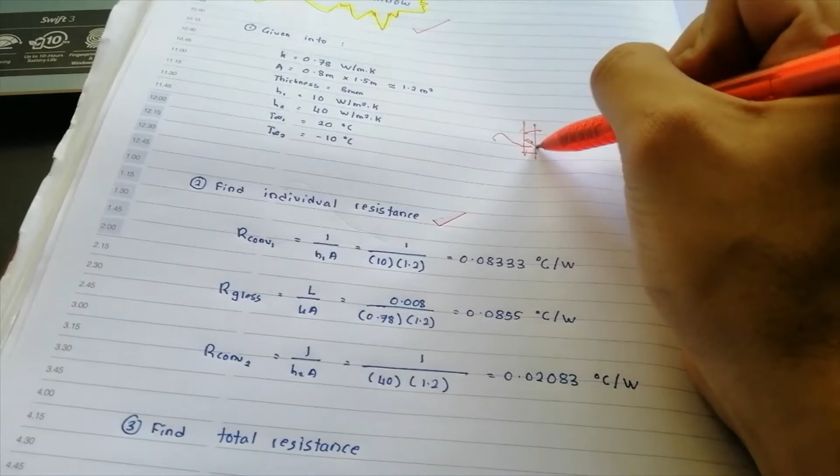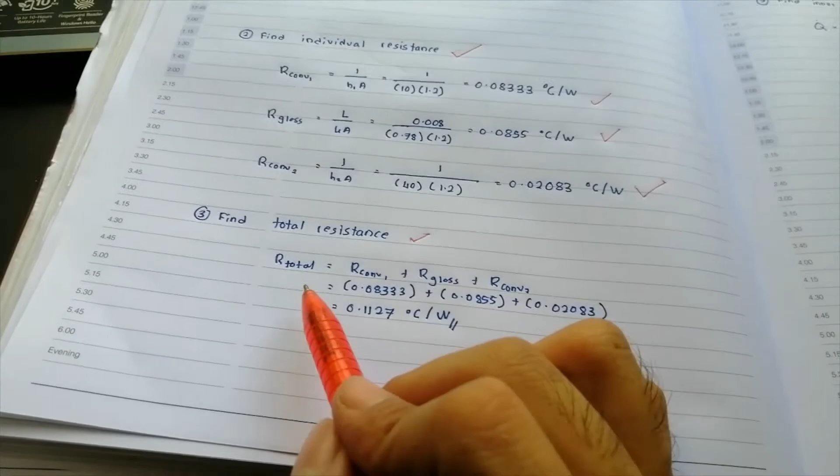So there's a window here, and then heat passes through here, and then we find the R convection, R glass, R convection, Q, and we get this answer. Next, we move to find the total resistance, meaning we sum up all these items, so we get this value: 0.1127 degrees Celsius per watt.

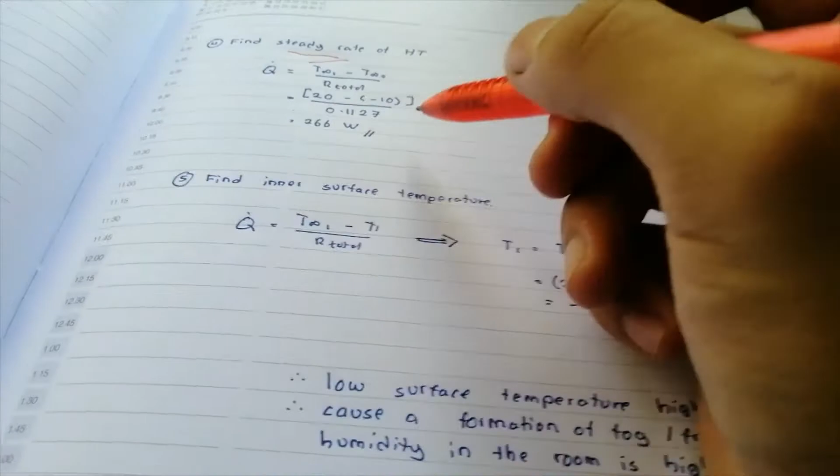And then we need to find the steady rate of heat transfer. As you can see here, this is from the steady rate formula, and we got the answer 266 watts. And then for the inner surface temperature, we reshuffle this formula, and then we got this temperature. So that is for the single pane window.

So a low surface temperature is highly undesirable. Why? Because it can cause the formation of fog and frost when the humidity in the room is high.

Okay, so now I will pass to my friend Luqman to continue about the double pane window calculation, how to prove it. So I will pass to him, Luqman. I think that's all from me. Now I'll pass to Luqman.

So our friend Jason, who stays in Australia, is confused about choosing either a single pane or double pane window. Danial has solved it for the single pane window, and he asked me to do it for the double pane window. Okay, I think I got it. So let's start the calculation.

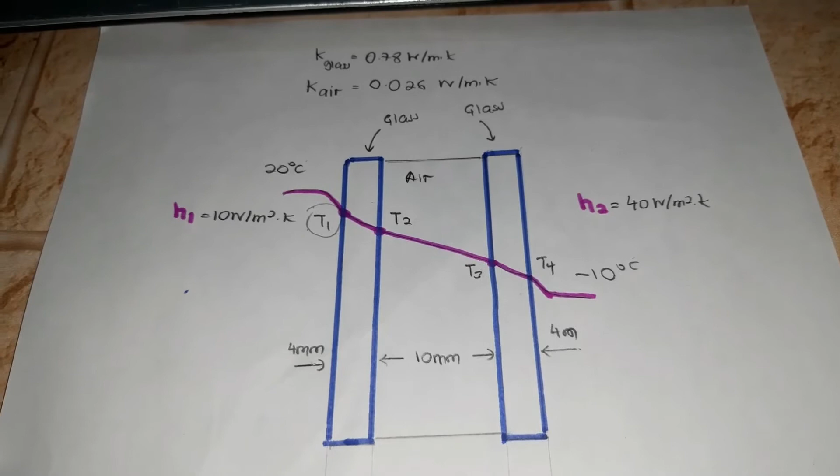And here we go. We have a double pane window consisting of two 4mm thick layers of glass with K of 0.78 watt per meter Kelvin, separated by a 10mm wide air space with K of 0.026 watt per meter Kelvin.

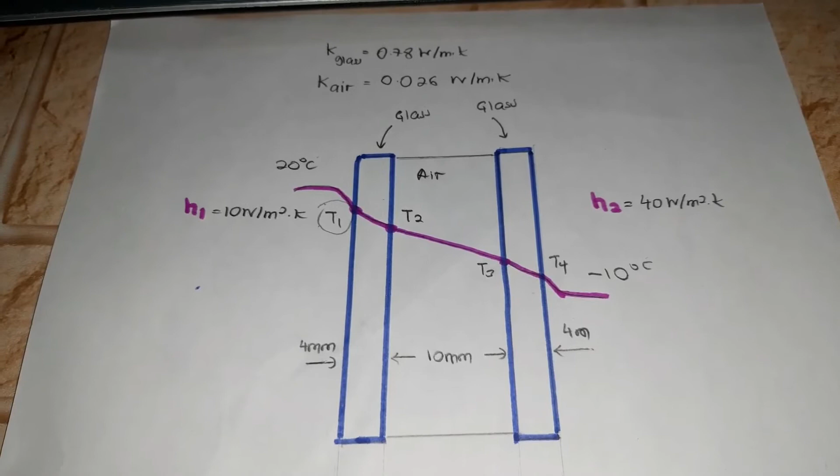We have to find the steady rate of heat transfer through this double pane window and the temperature of its inner surface T1 for a day during which the room is maintained at 20 degrees Celsius, while the outdoor temperature is negative 10 degrees Celsius. We take the convection heat transfer coefficient on the inner and outer surfaces of the window to be H1 equal to 10 watt per meter square Kelvin and H2 equal to 40 watt per meter square Kelvin. This is our free body diagram.

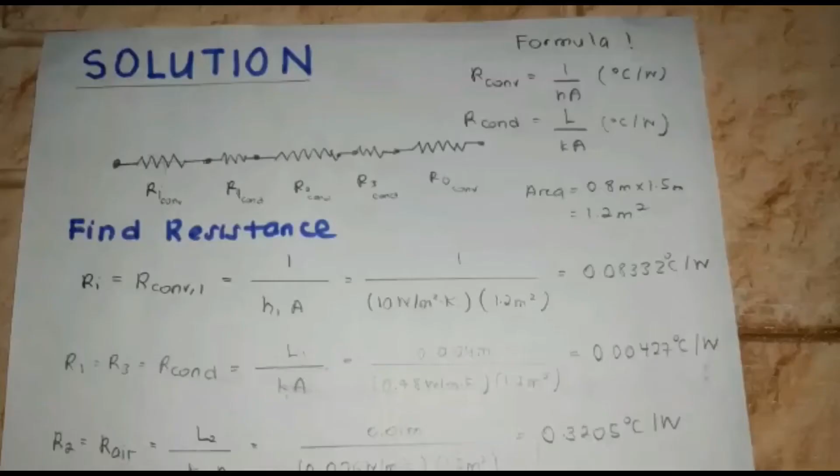We have drawn the thermal diagram using the formula for R convection, 1 over HA, and R conduction, L over KA. H is the convection coefficient, L is the length, K is the thermal conductivity, and A is the area.

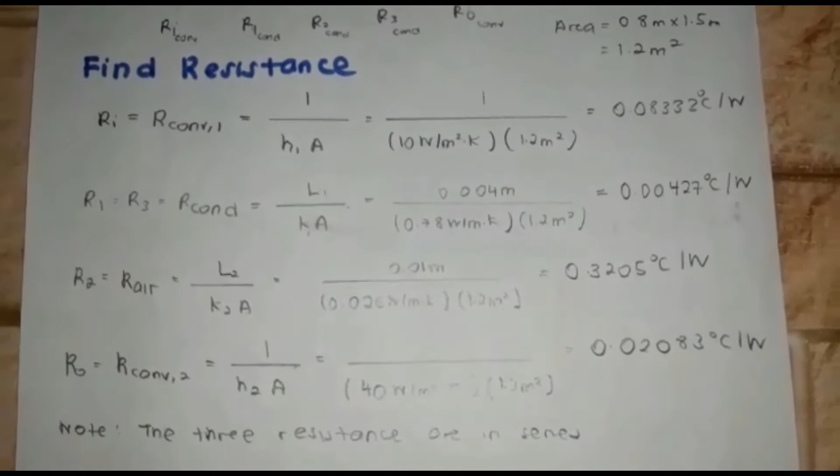We have to find the total resistance of the thermal circuit. We have about 5 resistors here, with R1 being R convection. Using the formula R convection equals 1 over HA, we substitute the values and get 0.0833.

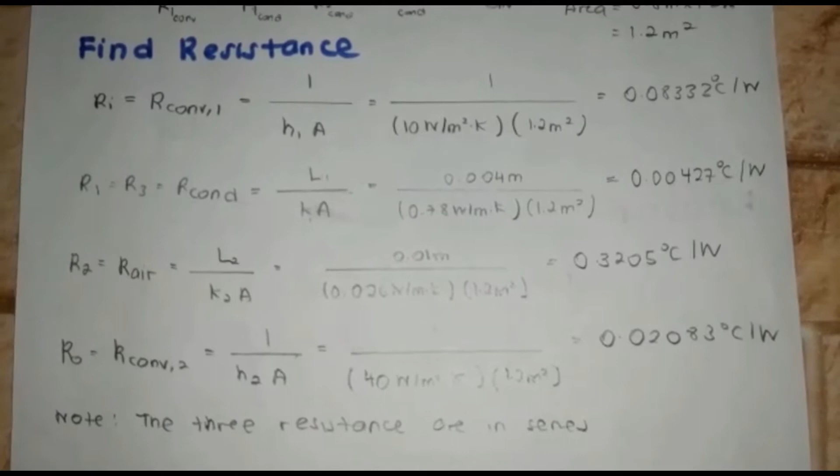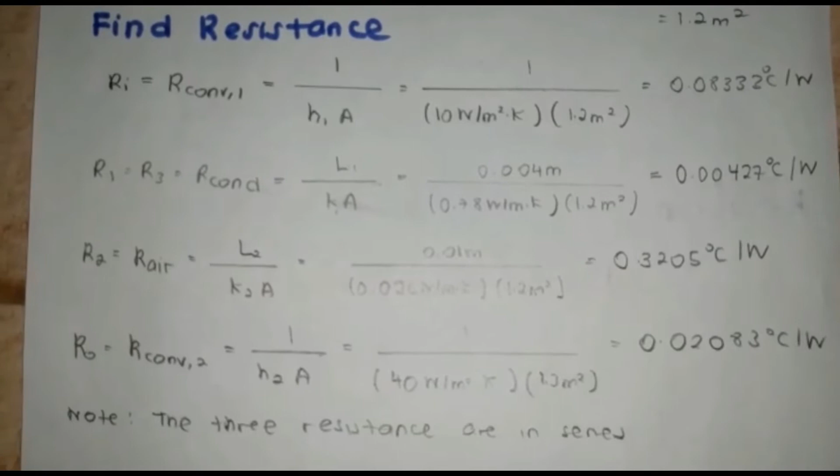Next, we find R1. R1 is equal to R3 because they have the same dimension. Using the formula for R conduction, L over KA, we substitute the values and get 0.00427 degrees Celsius per watt. R2 is the air layer, using the formula R conduction, L over KA, where the length is 0.01, which is the space between the two glasses. Using the thermal conductivity value for air and multiplying by the area, we get 0.3205 degrees Celsius per watt.

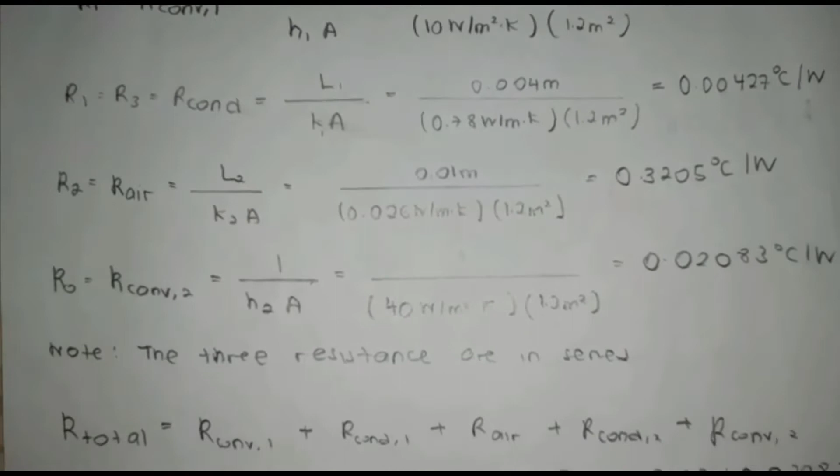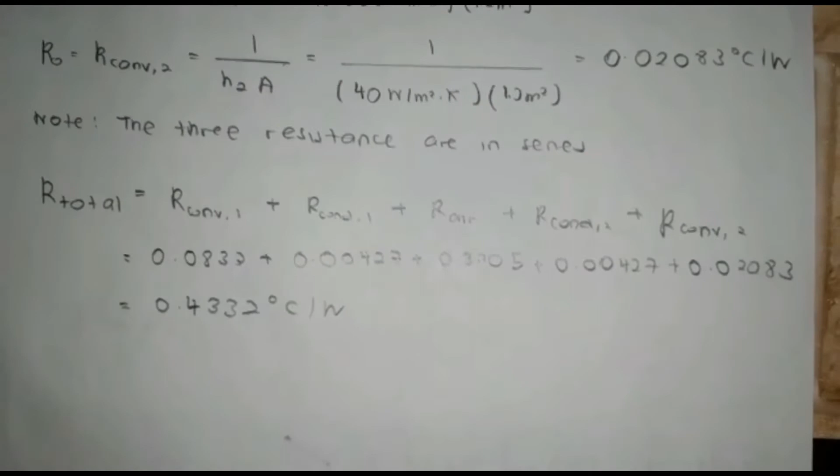Lastly, for the convection at the outer surface, using R convection equals 1 over HA, we substitute the value and get 0.02083. Since the resistors are in series, we total all the resistance and get 0.4332 degrees Celsius per watt.

Now we can find the rate of heat transfer using the formula Q equals T infinity 1 minus T infinity 2, divided by R total. We know T infinity 1 is 20 degrees Celsius and the outer temperature is negative 10 degrees Celsius. We substitute the values and get 69.2 watts.

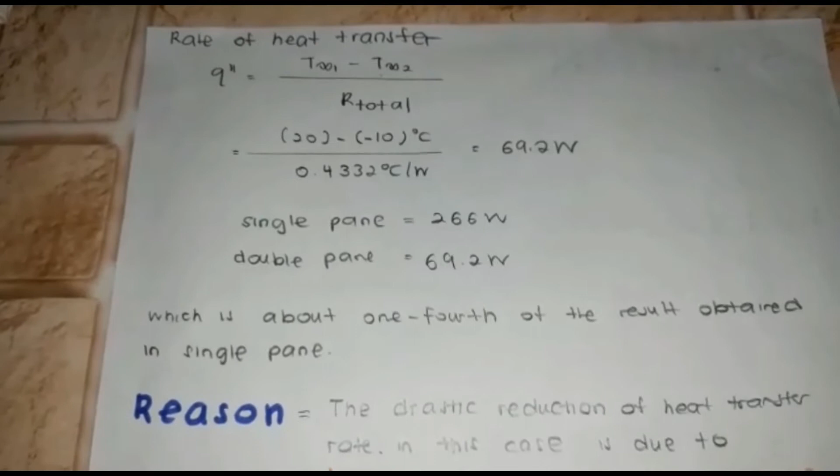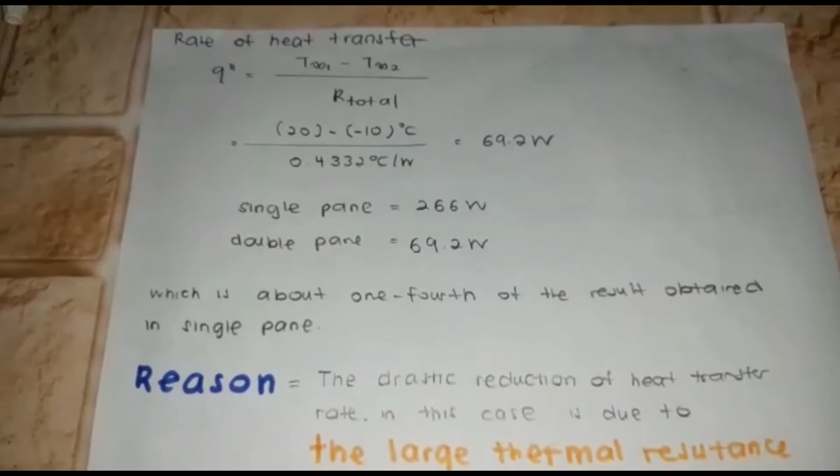For the single pane, Danial calculated and got 266 watts. For the double pane, I calculated the value as 69.2 watts, which is about 1/4 of the result obtained for the single pane. This drastic reduction in heat transfer rate is due to the large thermal resistance of the air layer between the glasses.

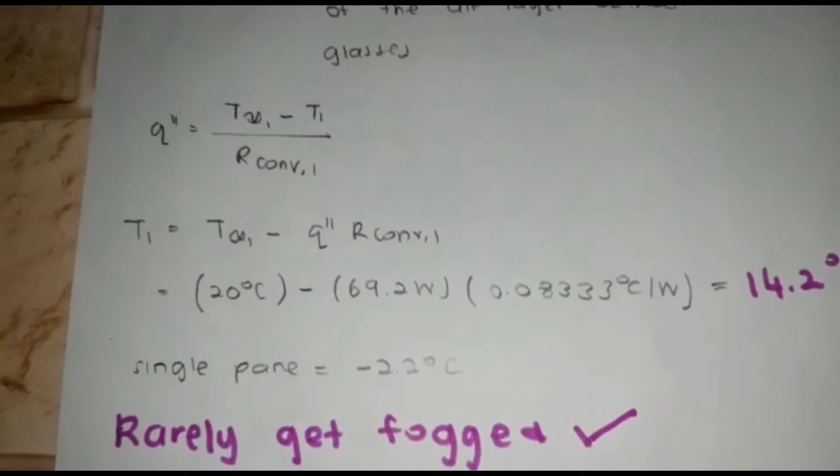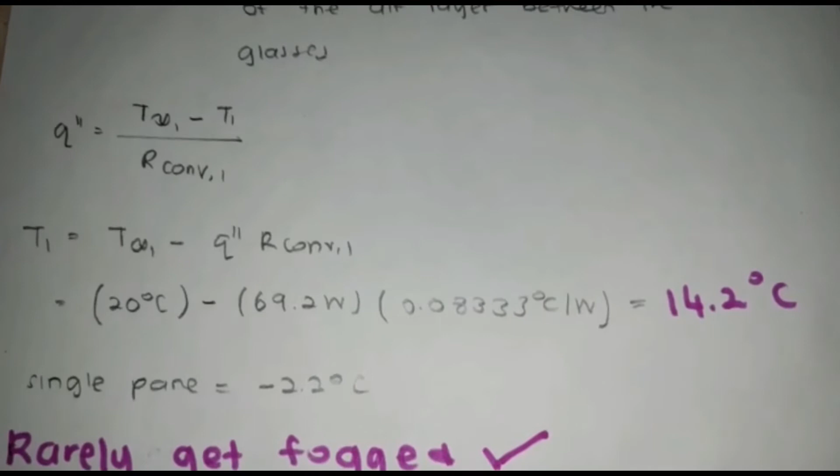With the rate of heat transfer at 69.2 watts, I can find the surface temperature T1 using the formula: rate of heat equals T infinity 1 minus T1, over R convection. We use R convection because this temperature range, between T infinity 1 and T1, is in the convection region. Rearranging the equation, T1 equals T infinity 1 minus the rate of heat transfer times R convection 1. Inserting the values, we get the final answer: 14.2 degrees Celsius.

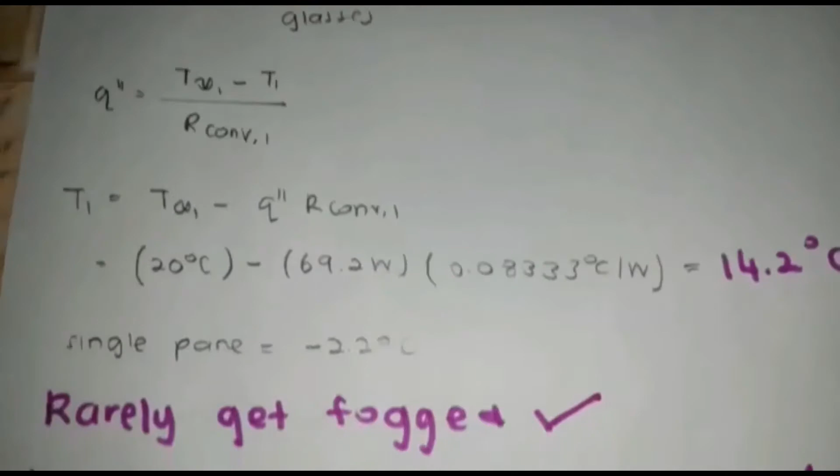For the single pane, the value is negative 2.2 degrees Celsius, which is too low and easily causes the window to frost during winter. For the double pane, it is better because it rarely gets fog, and in addition, it can reduce heat gain in summer.

So we have come to the conclusion. Danial calculated for the single pane window and I calculated for the double pane window. I suggest Jackson choose the double pane window because the temperature of its inner surface is considerably higher than that of the single pane window obtained in the previous calculation.

Therefore, a double pane window will rarely get fog, and it will also reduce heat gain in summer, thus reducing the air conditioning cost, which makes this choice better for Jackson. So Jackson, make sure you choose the double pane window. Next, we move to the application in industry.

Application of heat exchanger in industry. We are wondering how the big amount of food is being stored for some time, so we decided to choose the refrigeration system.

Before that, let me give some brief definition of what is a heat exchanger. A heat exchanger is an energy or heat exchange system between a hot and a cold fluid. So in refrigeration systems, heat exchangers are essential elements.

In a refrigeration circuit, during cooling, heat exchangers are used as an evaporator to absorb energy from the refrigerant. On the other hand, during heating, heat exchangers are used as refrigerant condensers to discharge the energy. In some refrigeration cycles, depending on the application, it is necessary to superheat or supercool the refrigerant, and heat exchangers are also used in those cases.

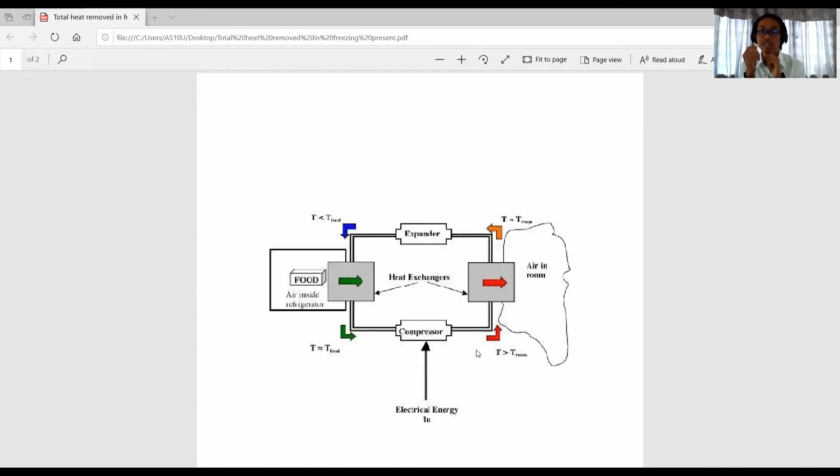Now I'll continue to explain a little bit more on the heat exchanger in refrigeration. First thing, in a refrigerator a refrigerant is needed. The refrigerant first passes through a small turbine, and then in the refrigerator, the refrigerant will lower its internal energy until its temperature is lower than the air of the refrigerator.

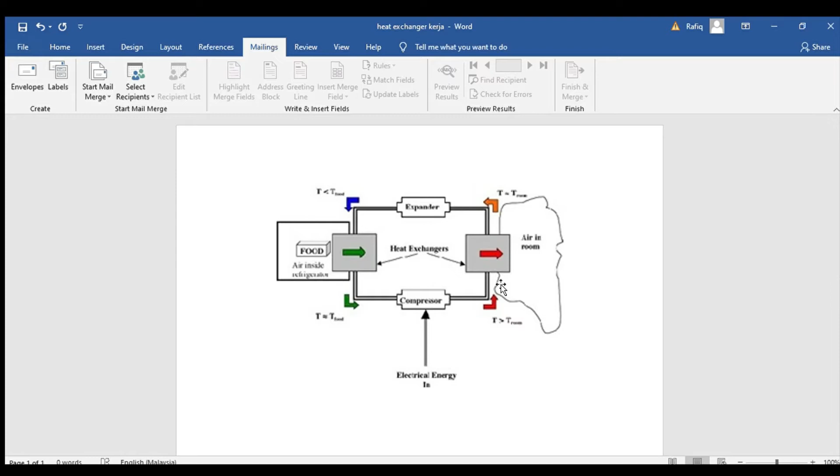Once the temperature is lower, the heat exchanger is then used to transfer the energy from the refrigerator to the refrigerant. Then the compressor adds energy to the refrigerant, continuing to add energy to increase its internal energy.

So when the refrigerant's temperature is hotter than the surrounding temperature, it is then passed through the heat exchanger to transfer energy from the refrigerant to the surrounding, making the air inside the fridge cool. So this is how a refrigerator stays cool.

So first the refrigerant in the refrigerator gathers energy, raising its temperature, and then it transfers to the surrounding temperature to keep the air inside cool. After the transfer of energy, the refrigerant then repeats the cycle. So this is basically how a refrigerator stays cool. And that is all.

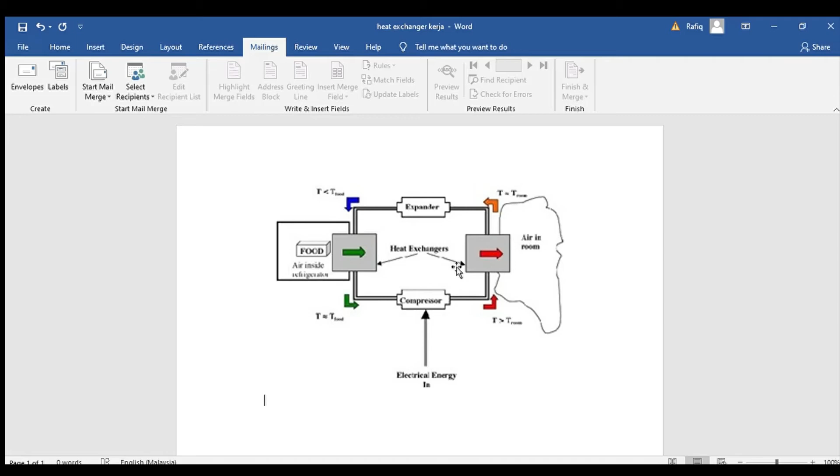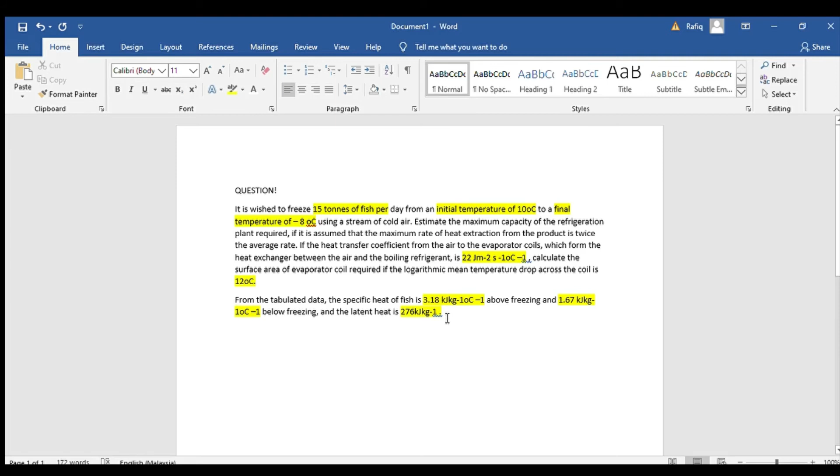First thing first is to find the enthalpy change in fish. In order to find the enthalpy change in fish, it is equal to heat loss above freezing plus heat loss below freezing plus latent heat. I've highlighted the key values to make it easier, and then we just put in the numbers, and we have the enthalpy change of 321.2 kilojoule per kilogram.

And next, for the further calculation of these, I will pass to Radzi.

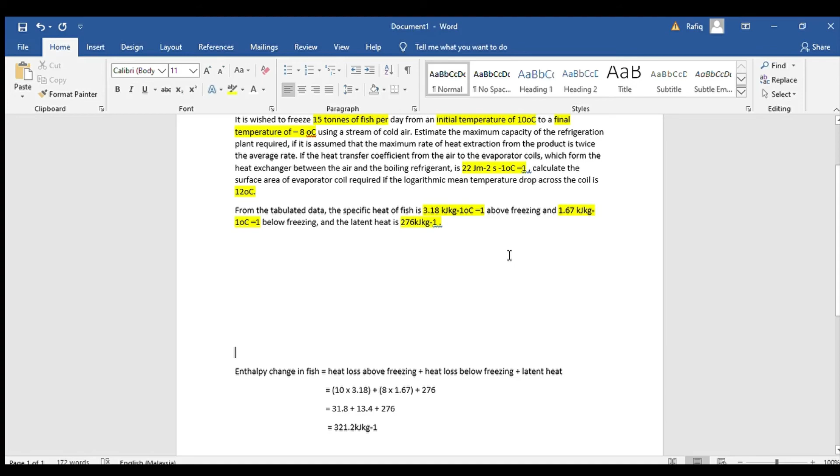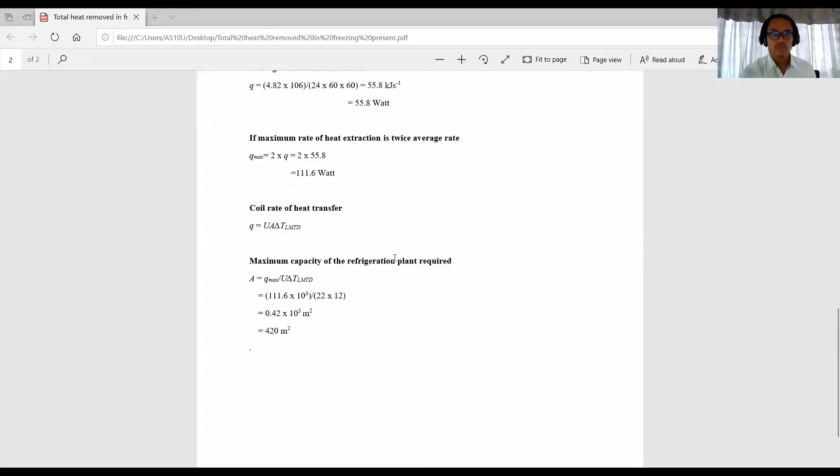To further the calculation, I will continue what Rafiq has done. To find the total heat removed in freezing, 15 times 1000 kg times the enthalpy change, and we got this value.

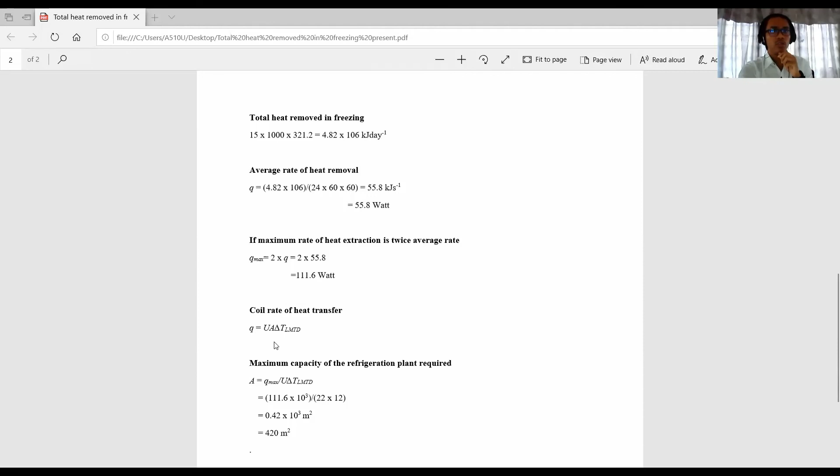And then for the average rate of heat removal, divide by 24 hours times 60 minutes times 60 seconds, so we got 55.8 watt. And then stated there that maximum rate of heat extraction is twice the average rate, so Q max equals 2 times Q, so we got 111.6 watt. The formula is Q equal to UA delta T log mean temperature drop.

So rearrange the equation to find the maximum capacity of the refrigeration plant required. We just substitute all the values there, and for Q max we need to change into joules since the heat coefficient is given in joules. So calculate that and we got 420 meter squared. That's all for the calculation.